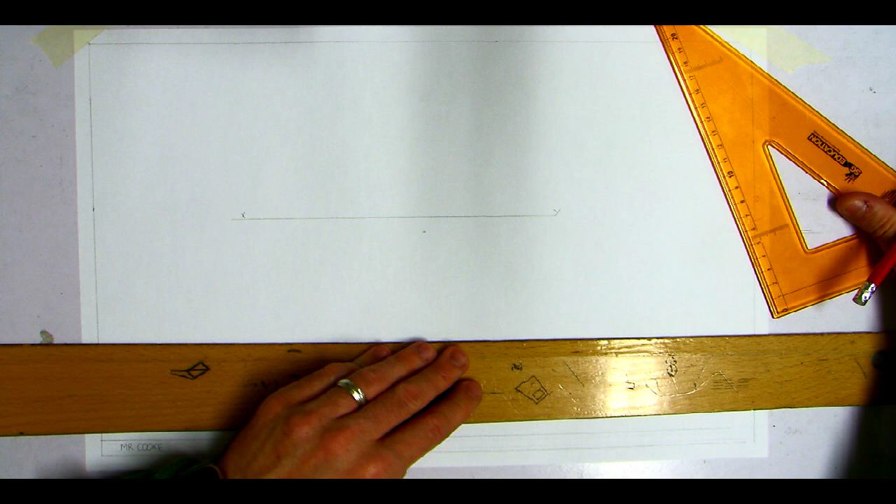I'm going to step down by 10 millimeters from the XY line. It doesn't give me a measurement, so I can make it up myself. Then I'm going to draw my square based pyramid, 52 millimeters in diameter or in size. So measure 52.

This is drawn with a 45-degree set square.

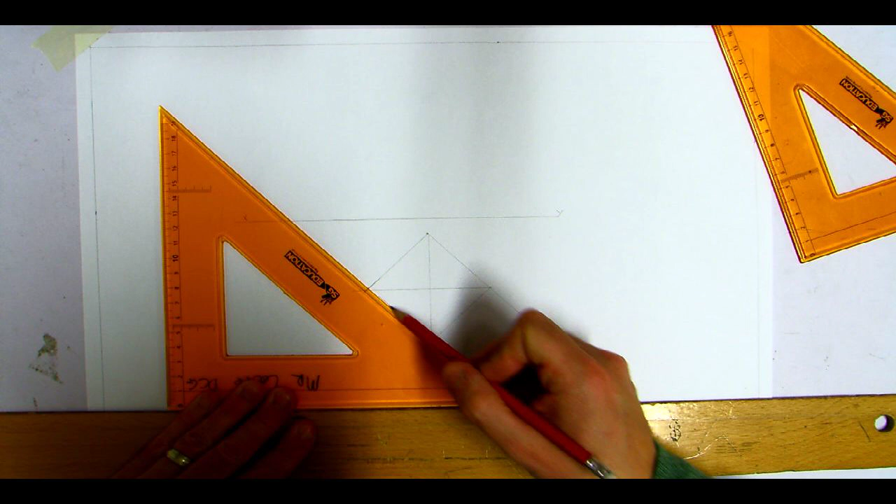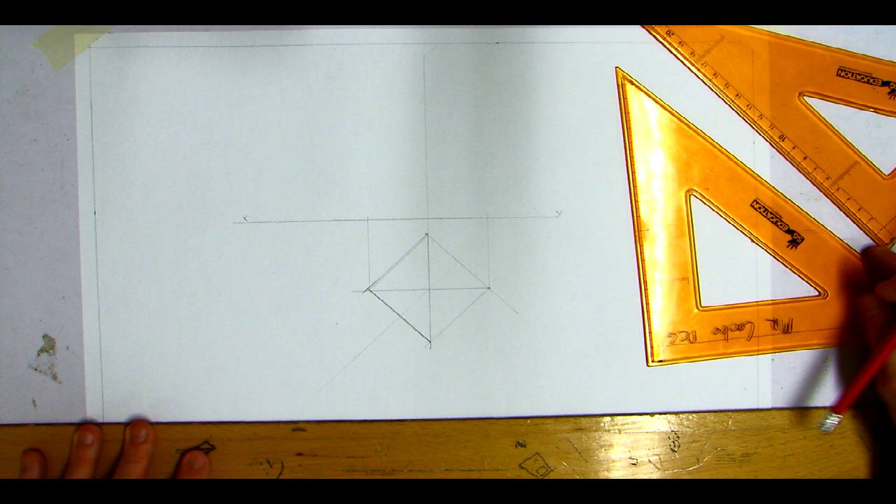Now, there is the plan view of my square base pyramid. What I can do is try and draw the elevation of that also. So I'm going to bring up my base points. There is something I want you to start to do in this question, and that's to label it. I'm going to label each corner here A, B, C, D, and O for the pyramid. O is going to be the top point.

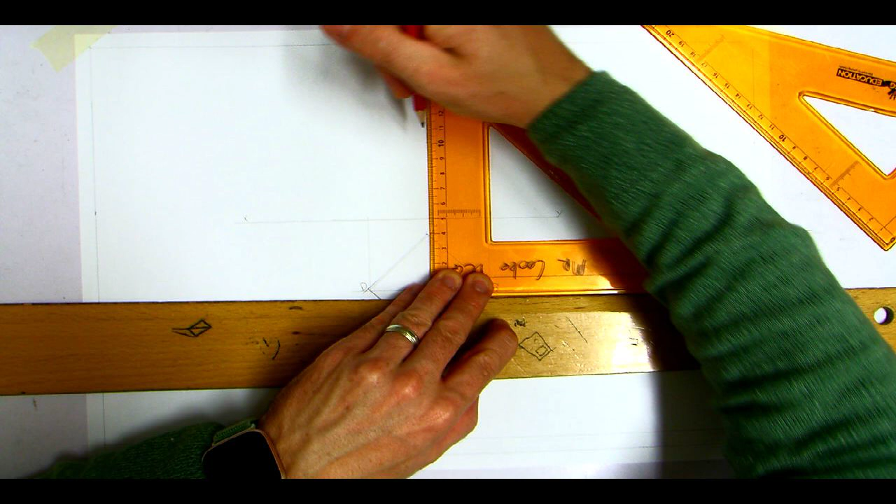Solids in contact. Reading the question in the book, it tells us that the height of the pyramid is 58 millimeters, described as the altitude. So I'm going to step up 58 millimeters, again using sharp equipment so that we can get accurate points.

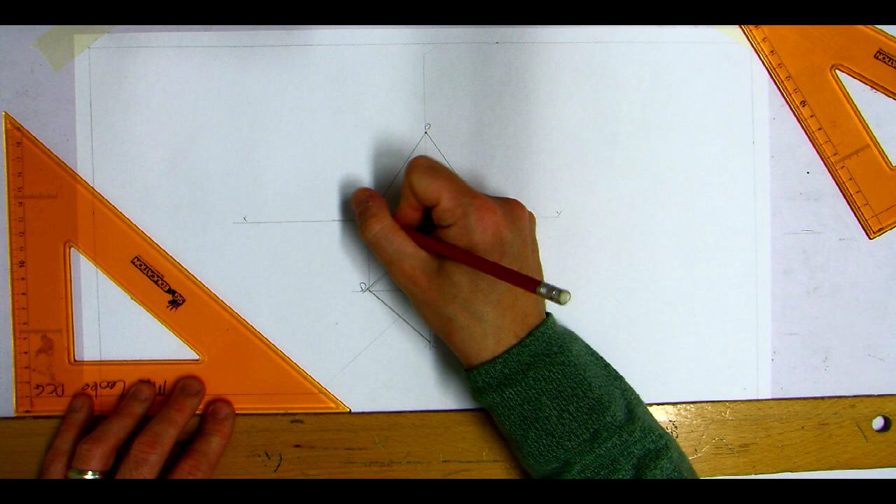And that is my pyramid. So I have O up here, B is there, A is at the back, C is at the front, and D is on the left. There's nothing more that I can draw at the minute for this question.

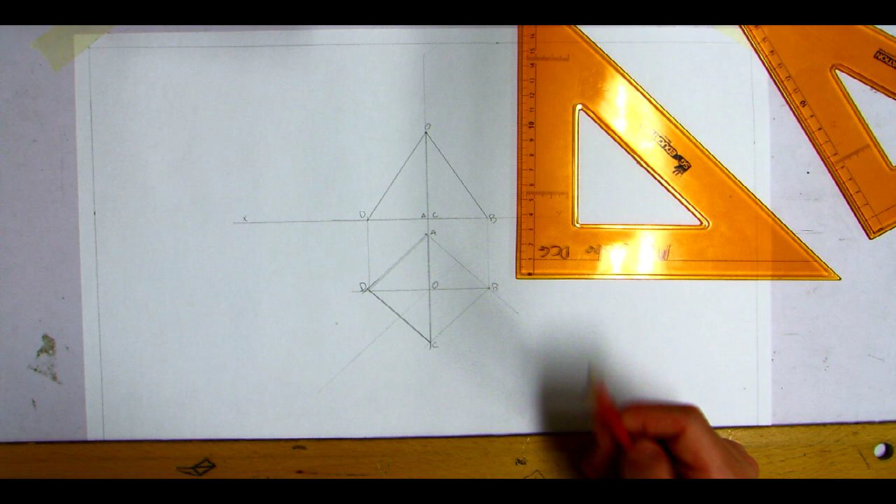Now, by reading the question, it says that the sphere is 24 millimeters in size - it's 24 millimeter in radius, apologies. And it's down here somewhere, but where do I put the center point? I don't know, it doesn't tell me.

So this is something new that I want everybody to learn. We're going to do an additional view. Now I'm just going to show you this very quickly with a little model. Let me get my pyramid, and then I'll be able to explain it.

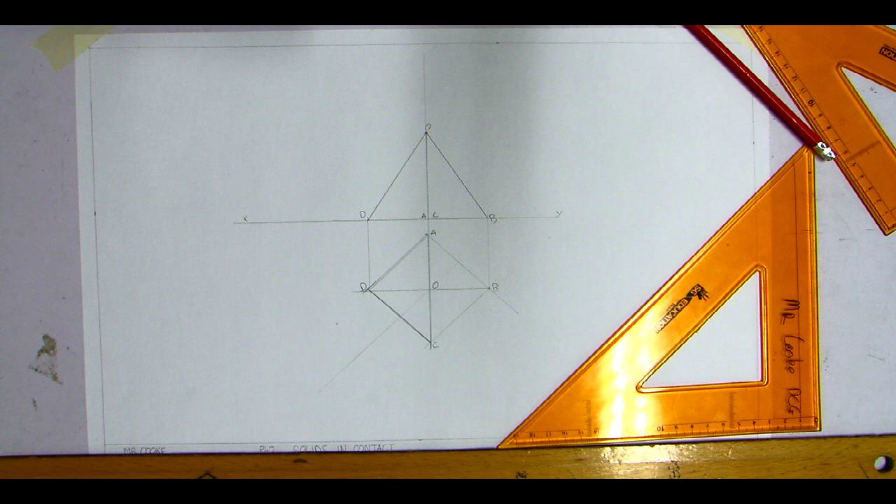So just to explain this to you, this is what we call a truncated pyramid. Can we pay attention here, guys please? That's essentially what we're trying to draw. I have a sphere and I have a pyramid. I don't know where this center point goes.

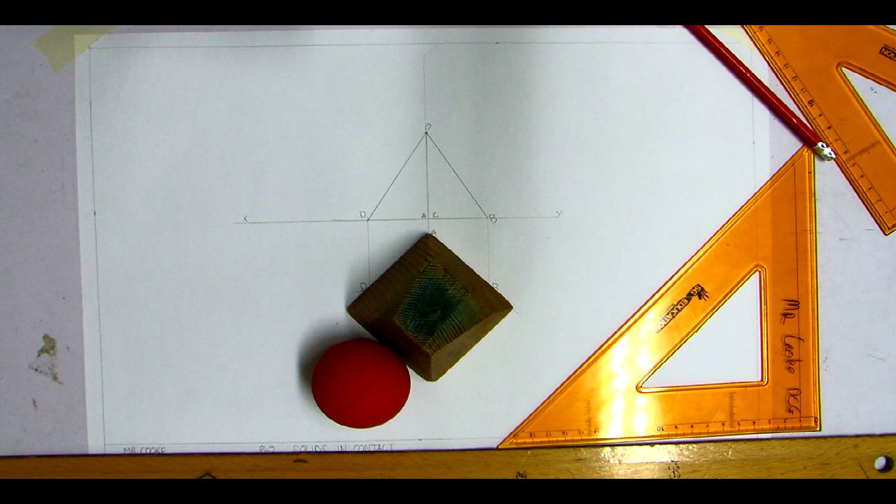If I change the size of the sphere, the point of contact between the two objects is going to be different. This sphere is slightly bigger, and if I replace that with a different size, the point of contact is going to be different.

Now, this question is slightly different than the ones we've done, because we have been given the radius of the sphere. In the previous two questions, we were not given the radius of the sphere. Just another example there - the point of contact is going to be a little bit different again. If I keep increasing or decreasing the size of the sphere, my center point changes, and the point of contact changes.

So what I want to do is get a little character, or take my personal point of view.

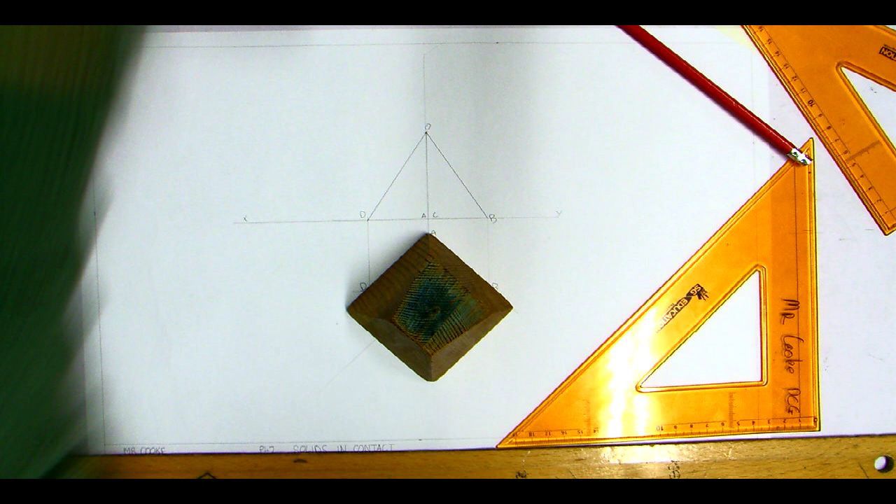So for our front elevation, guys, we are looking at the pyramid from here. We're looking in at the front, and that's what we see up there. If I show you that, that's where he is standing there, like that for the pyramid. And then when you're looking down the plan, that's where he's standing.

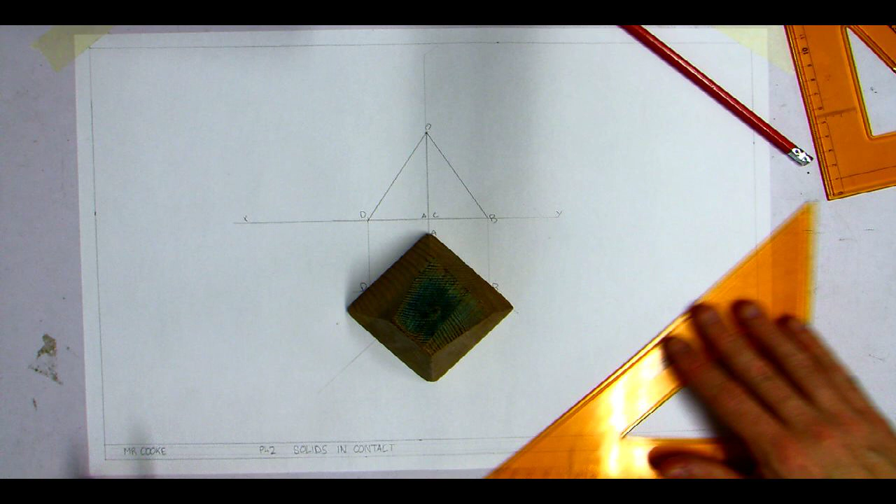What we're going to do is move around to here, and look in at this surface so that we're looking at it at 90 degrees. Let me just set that up. We're going to look in at this surface at 90 degrees, like so. Can you see that? Does that make sense?

See my little basketballer? Standing there, looking in so that we see this surface at 90 degrees, and so we see that circle where? What have I been describing this as? In the last couple of questions, I've described these two objects in what position? So where he sees these two objects, they're what?

Not separate. What are they? Side by side. Side by side. And that's why we moved this view.

In the previous question, we rotated it around because the two surfaces were curved - the cone surface was curved and the sphere was curved, so we were able to rotate the sphere around the cone. In this object, we don't have a curved surface, we have flat surfaces on the pyramid. So therefore, we have to move our viewpoint in order to see the surfaces or the objects side by side.

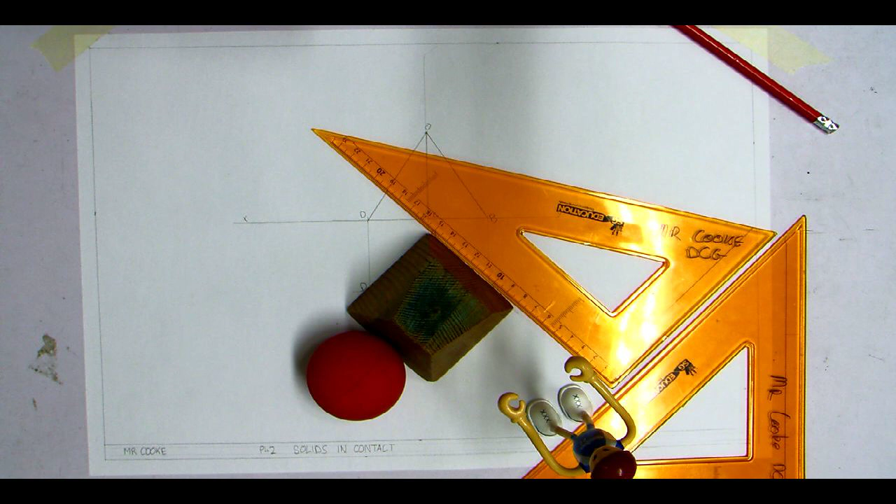So what we are doing now is creating what's called an auxiliary view. So with my 45 degree set square, I'm going to look in this direction.

Okay, I'm going to view in that direction. With my 45 degree set square, I'm going to take C and D and bring them up there. I'm going to take O and bring it up there. I'm going to take A and B and bring them up there. I'm going to recreate the ground.

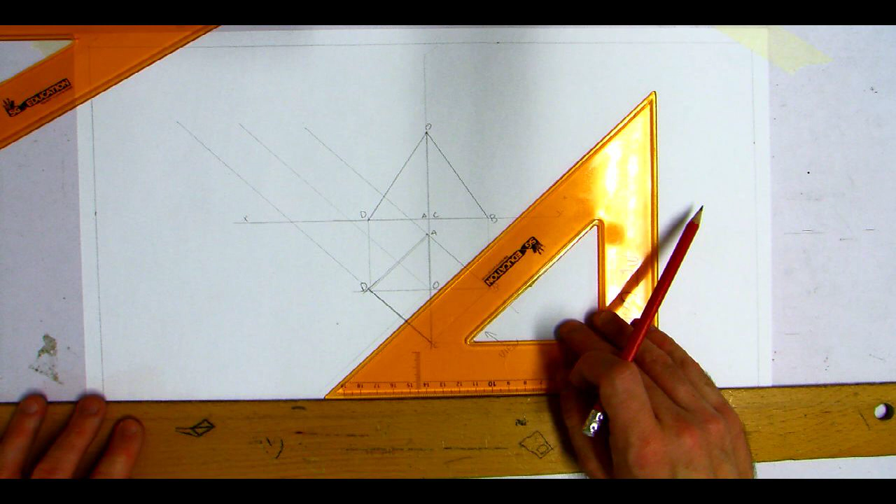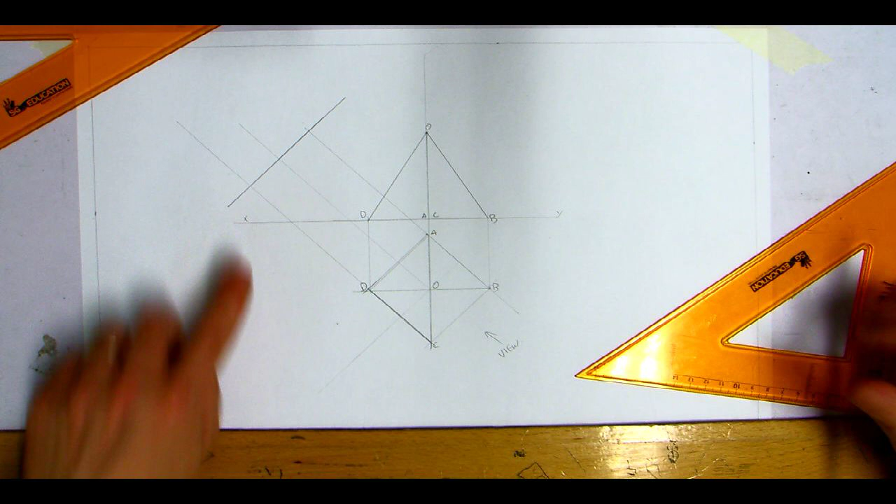The ground is going to be positioned anywhere as long as it doesn't interfere with my image. I know my sphere is going to end up somewhere here and somewhere there, so the ground I want to draw is going to be here. It's a copy of the ground that I already have, and this is known as our x1, y1.

Is that okay? This is known as an auxiliary view or additional view. Auxiliary is just a fancy name for a new view or additional view.

Now, what is the height of my pyramid? From the question, what is the height of the pyramid? 58. So I'll measure in 58.

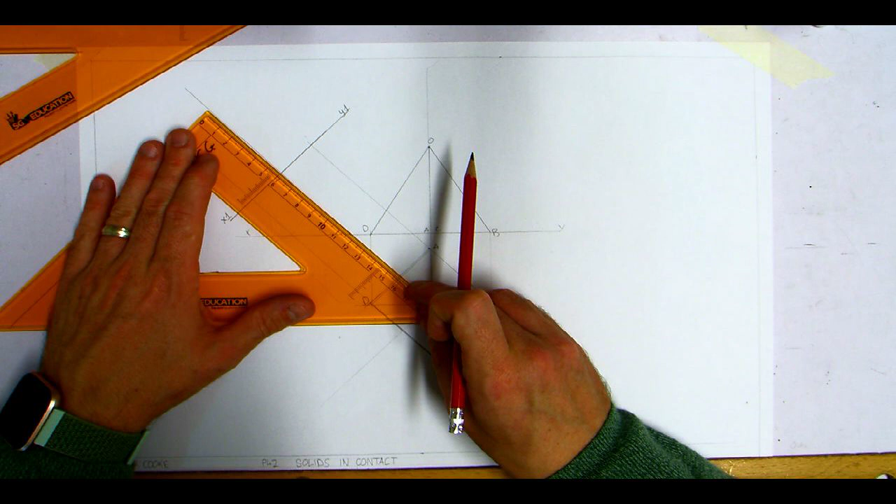That is point O. I'll bring O to my base points. These are my two base points, C and D, that I have labelled, and I want you to label them also, regardless if you understand what's going on or not. This is A and B. This is C and D.

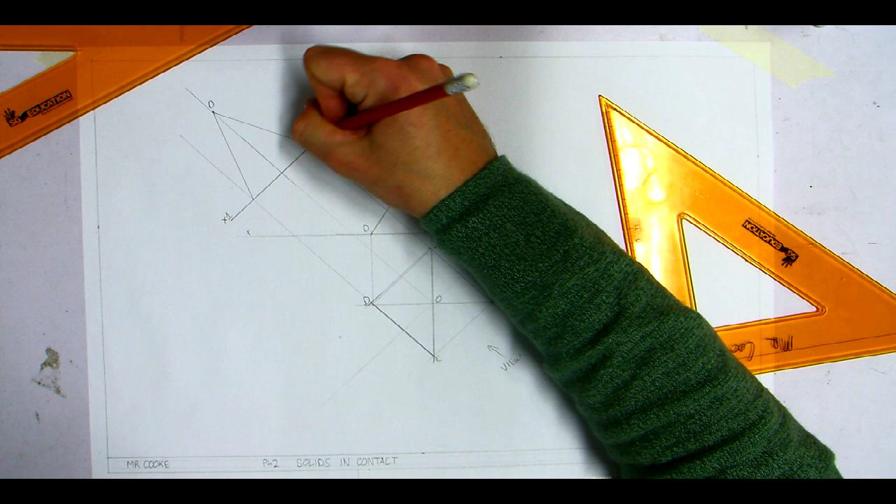I'm just going to draw it in heavy so that it stands out, so that people understand what the object looks like. The object is going to be different to the construction lines.

So why did I move to here? The reason I've moved around the object and looked at it at a different angle is because this object has flat surfaces and therefore we can't rotate the sphere around it. We could rotate the object, but that's going to create a lot of complication for us also, so we're not going to bother doing that.

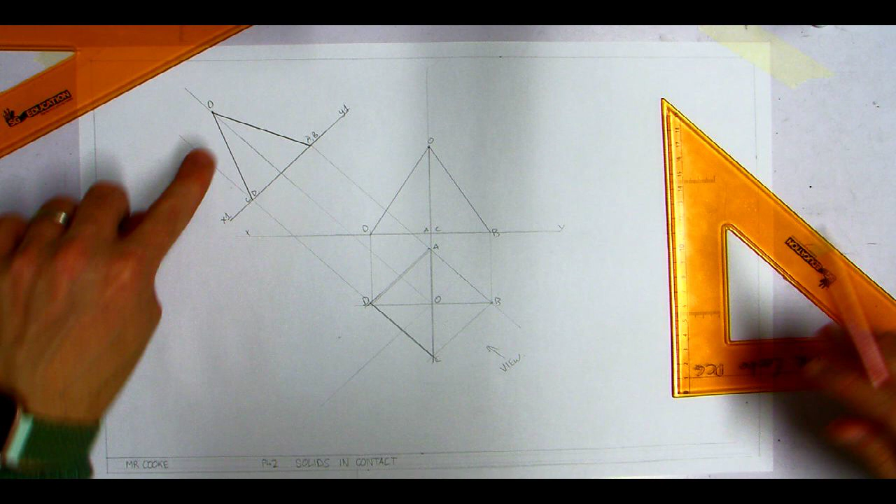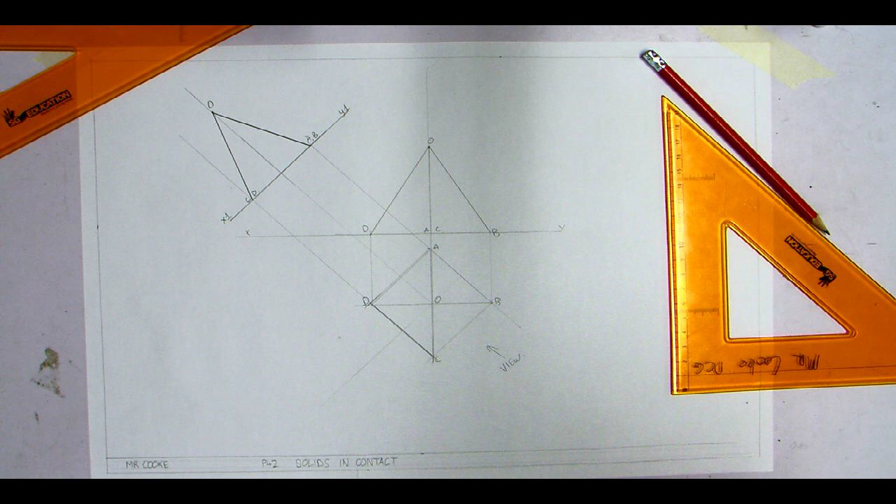Now that I have my view from here where I see the edge or the extreme generator, if I use a little bit of colour here just to explain this — this here is my yellow surface, so therefore that line is going to be my yellow surface.

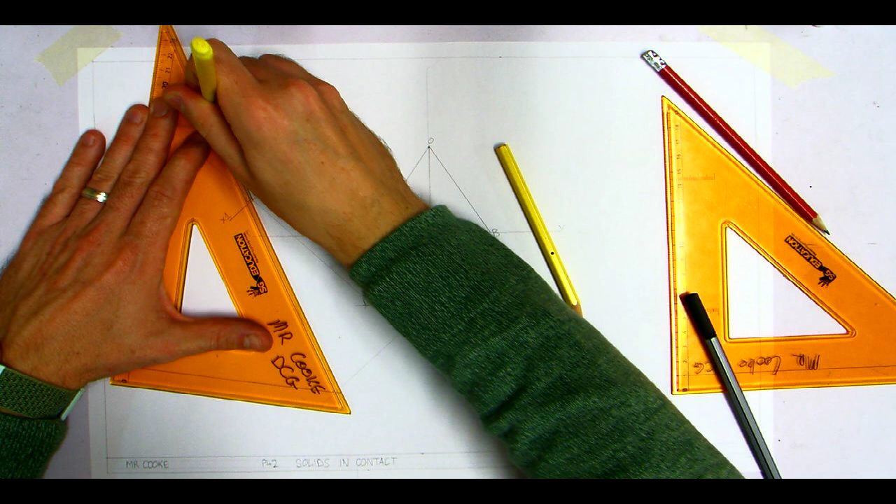Now, can we see that in the image? Yeah, can you see that? Yellow surface, yellow surface. Who has a question for me?

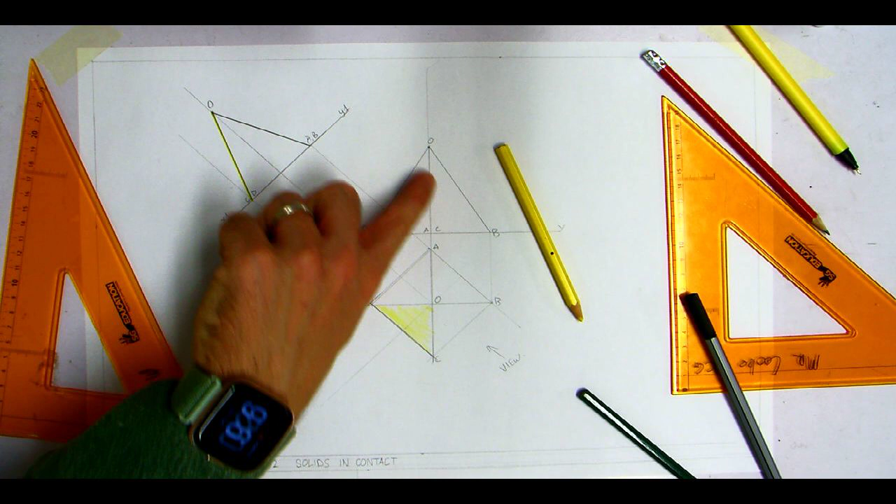Oscar asked, how long do you draw? It doesn't matter as long as it doesn't run off the page. I know that my end sphere, the one I'm trying to solve, is going to land somewhere here, so I want to accommodate for that. I just want to move it out of the way so that it's not off the page, but also not interfering with my solution.

Any other questions, guys? Keep them coming, please. Now, I know that my sphere is 24 millimeters in radius. So I'm going to use this example to you here.

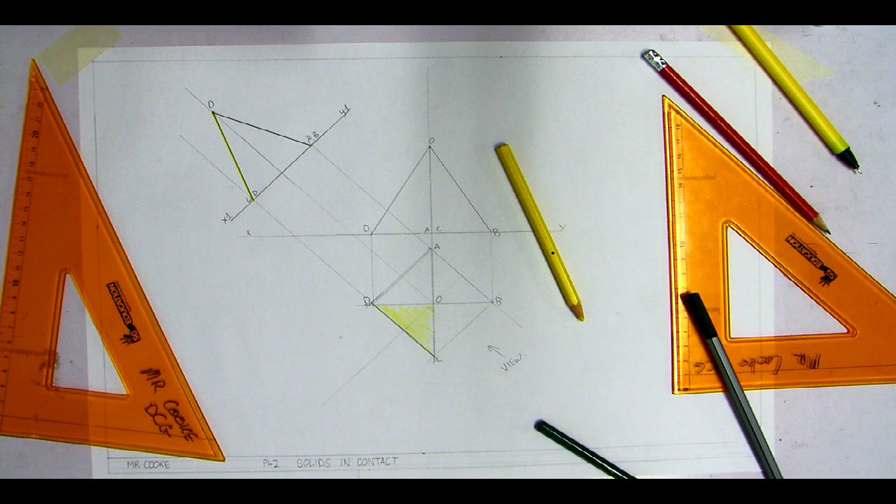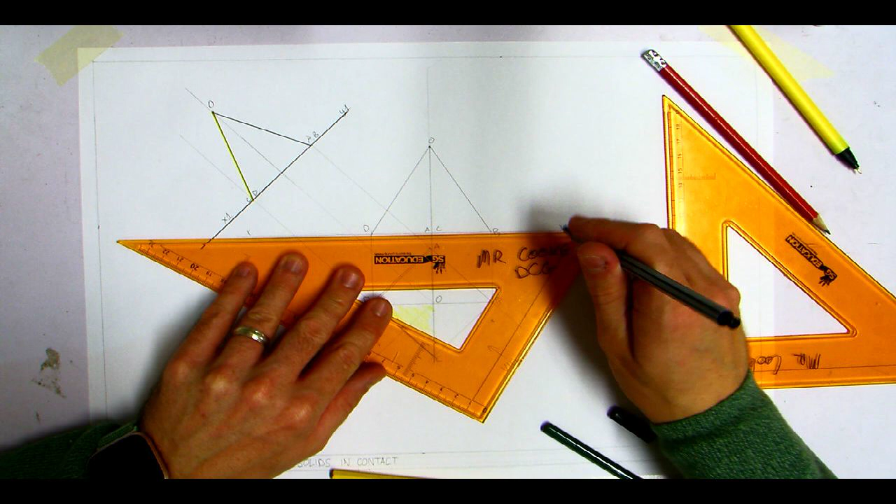So therefore, how are we going to find the center point here then? Any solutions? Any solutions, Louise? Anybody, any ideas? If we know the center point, the radius, and the distance of the center point to the outside of the circle, how am I going to find the center point here? Take your previous knowledge into consideration.

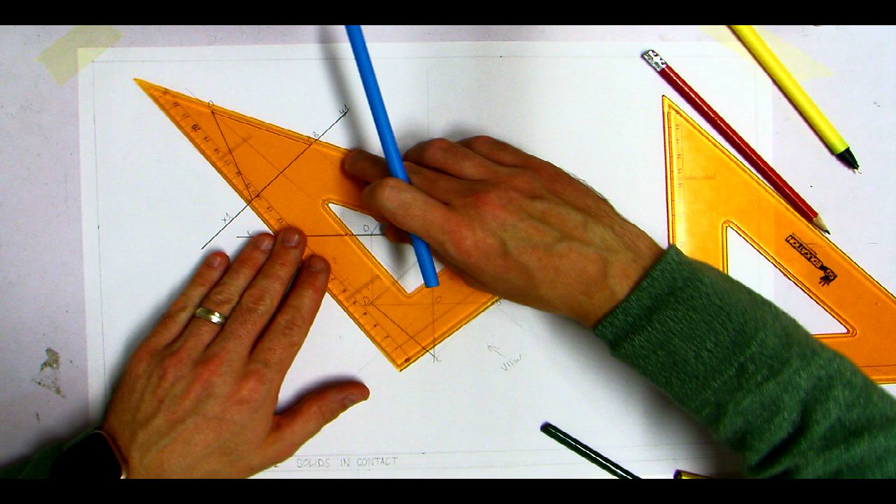Measure up 24 from where, Kira? From the x1, y1. So if I measure up 24 and I draw a parallel line to that, I'm going to use sliding set squares for this, even though it's a 45-degree line. I know the center point of my sphere has to be somewhere on that blue line. How do I know that? Because it is 24 from the ground.

Is there anything else I can do? Remember, to find the center point we generally have to do two techniques and combine them, or two steps and combine them. What's the second thing I could do, Gavin and Dennis? Don't worry too much about it, let's just do this. Finding the bisect — I could do that, yes, I could bisect the angle, absolutely. Is there anything simpler I could do than that? Why 45 degrees?

So this is an obtuse angle, so I wouldn't be able to do that.

Sean? Measure it from where? From the CD line. CD's, that's a point view of that, so that's the CD line there. Does that make sense? Very close, so give me reference to colour. Yellow line. Measure out 24 millimeters from the yellow line, and then what do I do?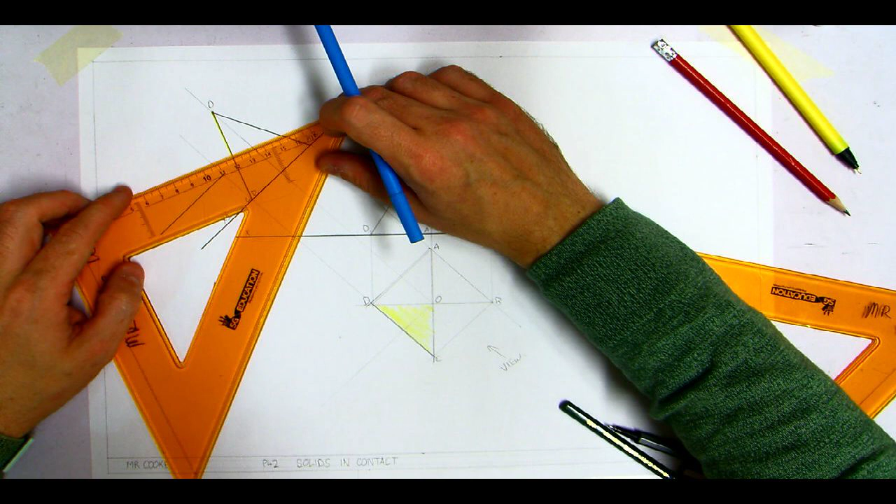I've measured out 24. I've only a point at the minute. What do I need? I need a line, because the sphere could roll anywhere along that surface, couldn't it? Where the path of the center point meets the path of the center point is my center point.

If I bisect the angle like you said, Mattis, I would still get the same point. But that's much quicker, is that okay? So you could bisect the angle, which we've done in the previous two questions, or I could just take my radius and step away from the surface that it contacts, the radius of the sphere. It gives me the center point.

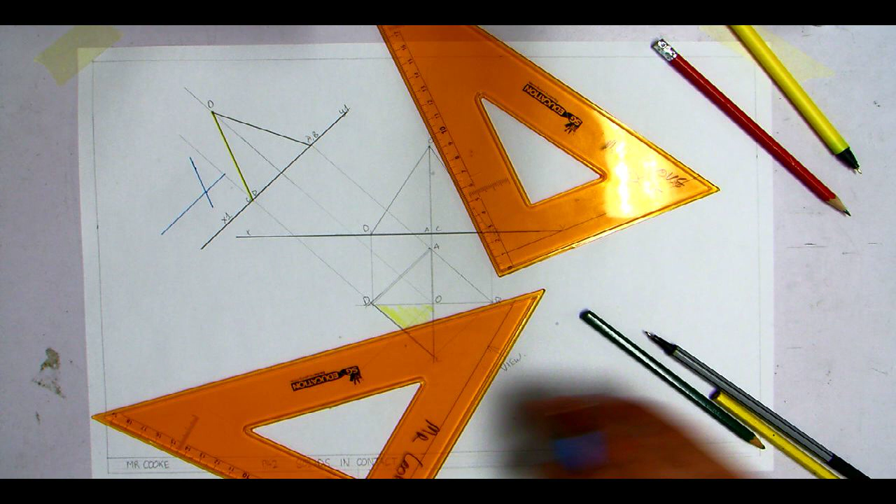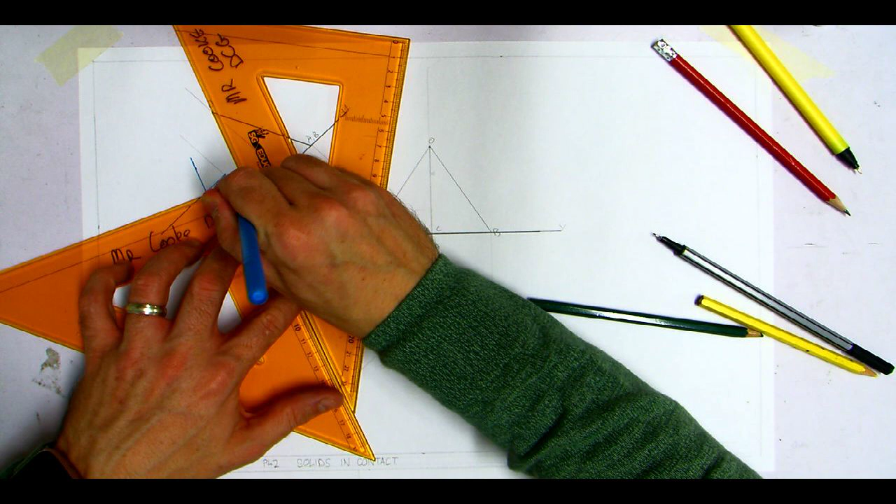I can then draw, my radius will come down to there, and my radius will also... if I draw my normal from the tangent, both radii will be the exact same. That's O-R and that's O-R. I set my compass to O-R and I draw in my sphere.

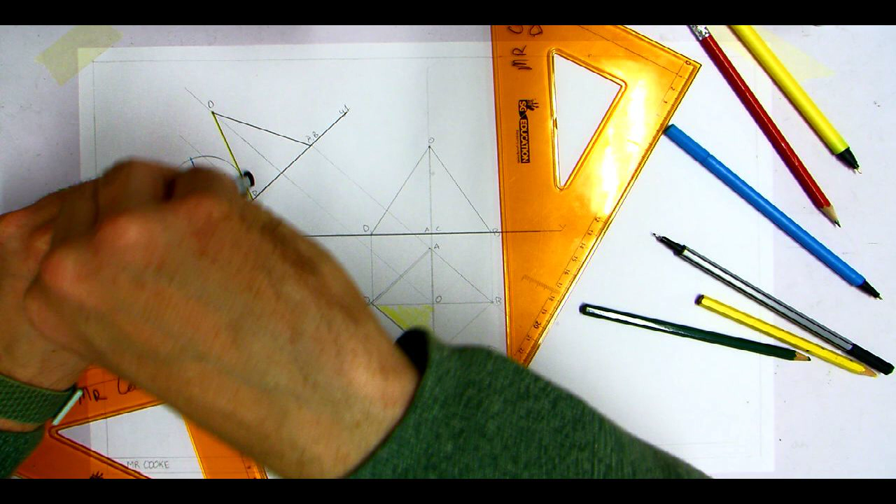Now, how do I solve the rest of the question? I found the difficult part, Oscar and Dominicus, okay? I found the difficult part. Now, how do I solve it?

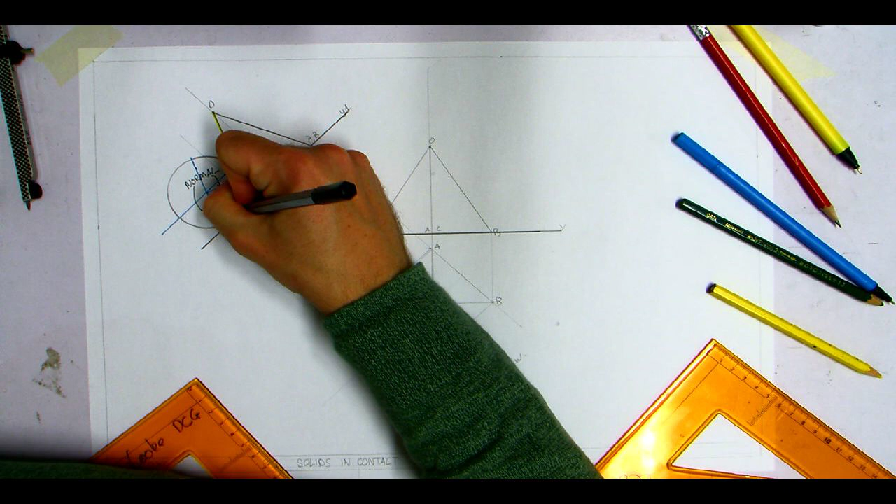So, where did you get the O-R lines? I created them myself. The O-R lines are normals to the tangents. You remember? So that's a normal, and that's a normal. Both are 90 degrees to the tangents. There are two tangents: one is the ground and one is the side of the pyramid.

So I need to do this.

This is brand new to everybody. Literally what I'm after doing is brand new to everybody. How do you do it? What is it? How do you do it? Were you listening to me? I was drawing. Okay, so I'll explain in a second. Is that okay? Just let me finish off the question. How do I now solve the rest of the question?

You better not be swinging in the chair, are you? Are you swinging in the chair? Do you realise they're over €100 to fix, to pay for? Yes? If you break it, you pay for it. So don't swing in it.

Now, anybody? Answers. How do I solve it? Where are we looking for it? Read the question. What does it ask us to do?

Point of contact. Yeah, so I've got point of contact here. We generally don't put in the point of contact between the sphere and the ground, by the way. There are 3 points, or 2 points, of contact: the sphere and the ground, and the sphere and the object, but you generally don't put it in between the sphere and the ground. Just to let you know, okay?

So the question asks: the plan of a square base pyramid and the sphere resting on the horizontal plane are shown. They are in contact with each other. Draw the plan and the elevation of the solids showing the point of contact. Have I got either of them done? Have I got the plan or the front elevation complete?

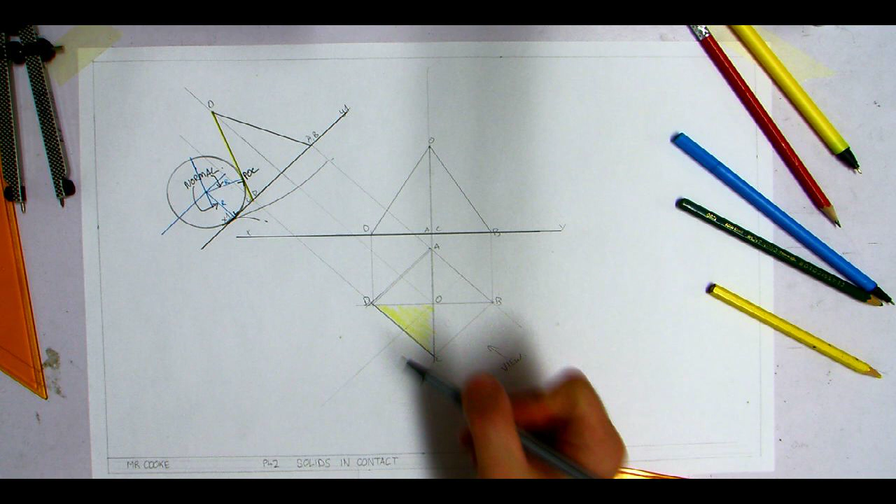Have I? I've got the plan complete. I need to bring the circle down, don't I? Yes. So how do I bring that down here? What angle am I going to bring it down at? Dennis? The same angle that you brought it up. Brilliant answer, the same angle that I brought it up.

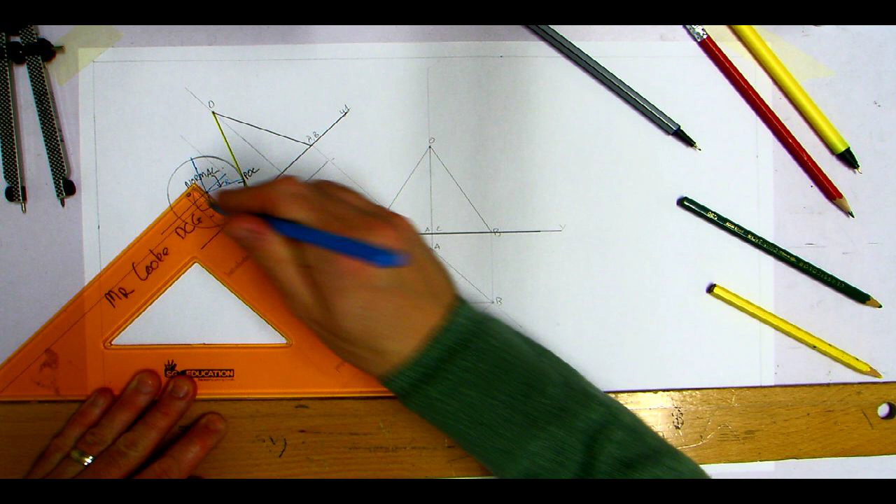And that angle was 45 degrees. So I will bring it down the exact same angle that I brought it up. Now I have my fixed center point. Now I know where the center of my... I'm going to call that C1, just because I have a C label already. I know where the center point of my sphere is positioned. So now I can take my radius again and I can draw it in my plan view.

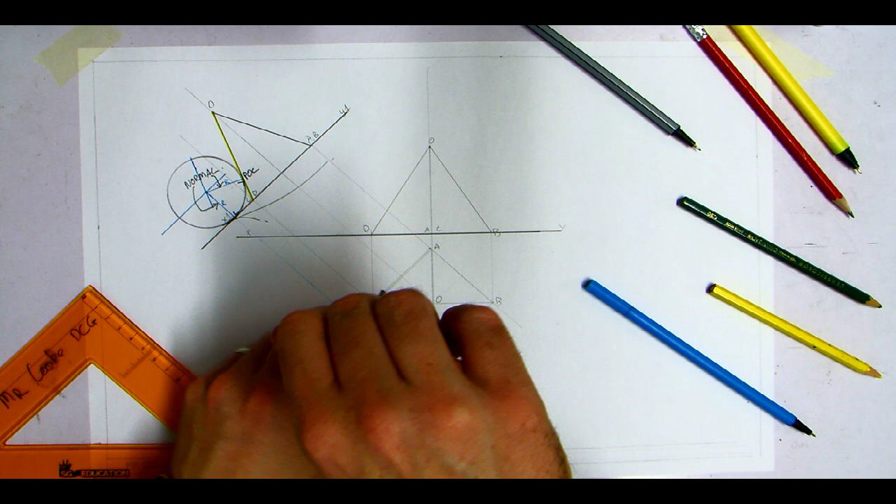There's no need for fake spheres in this scenario. We don't need to draw them in because we don't need to rotate the object around. So now that I have that, I'm pretty sure it's a green sphere, I can colour that one in because it's the finished sphere.

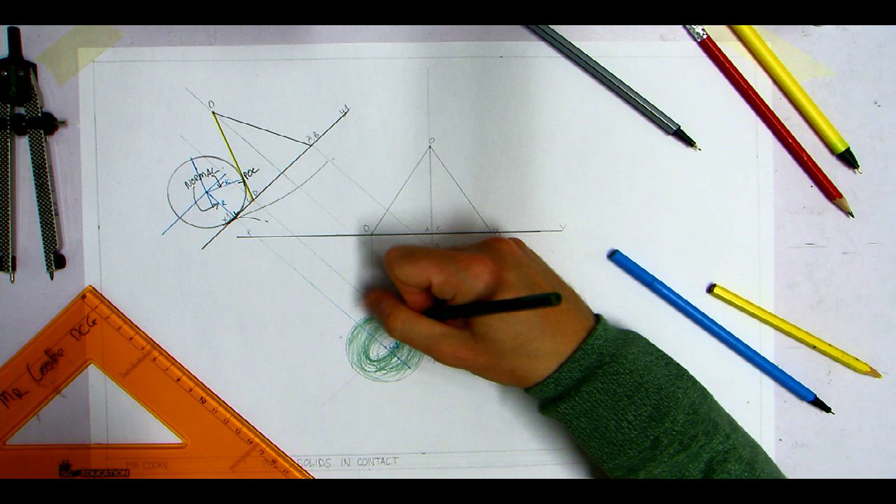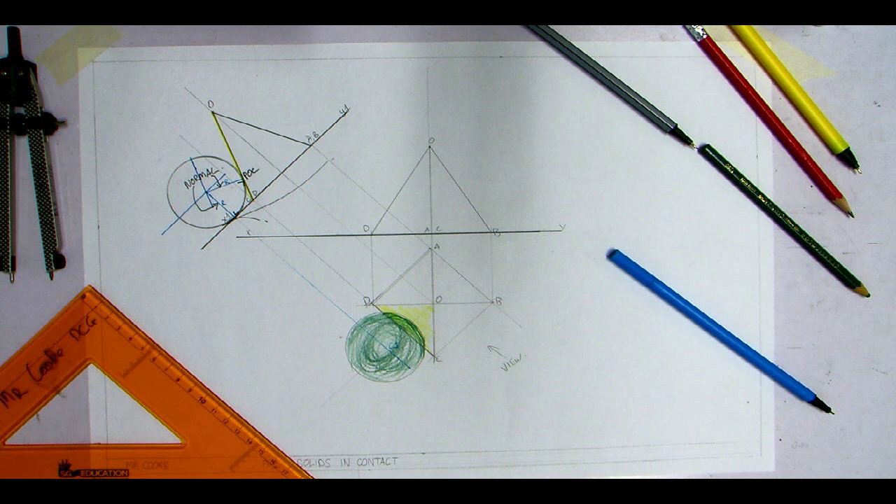And now how do I finish the question off? So I have my base sphere, I have my auxiliary view, and how do I finish it off? Bring the circle up, or the sphere up. How high do I bring it up? That is the question. So here's my center point here. I'm going to bring that up, but how, when, where do I know where the center point is finished?

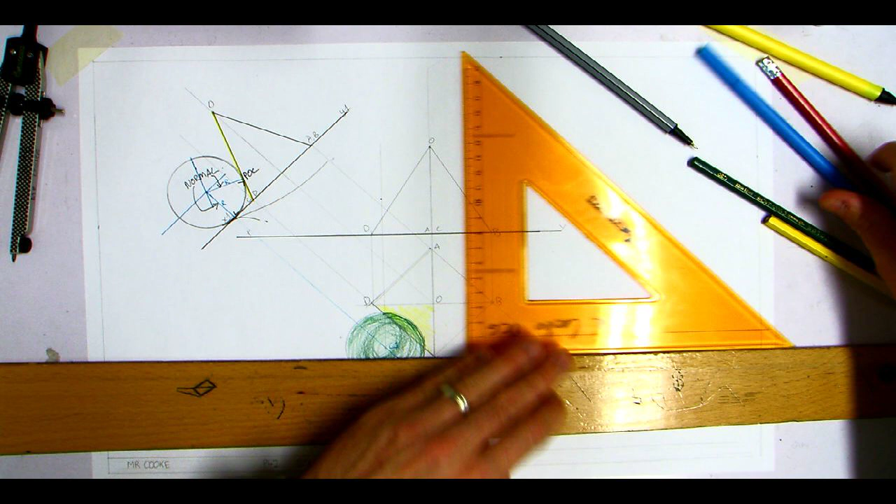24 millimeters up. Excellent. So from the ground we measure up 24. That's my center point, which I've called C1. I take my compass again and I redraw that in.

I colour it in, trying to make it look like a sphere, like a three-dimensional shape rather than a two-dimensional shape. So in order to do that we need to use tone, shade and shadows perhaps. I'm also sketching in a curved manner so that it gives the appearance of a curved surface, something that we need to build on, something that I also need to explain to you in more detail, but you get the idea for the minute.